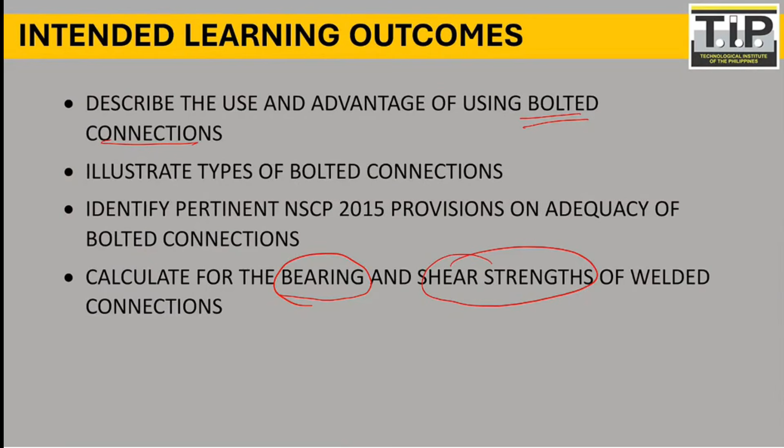The learning outcomes for this lesson is to describe the advantage and use of bolted connection. When do we use bolted connection? We're also going to illustrate the types of bolted connection and what materials we use. We'll identify the NSCP 2015 provisions to calculate the strength of bolted connection, considering bearing and shearing strength.

Bolted connections are connections that use threaded fasteners. I think all of you have already seen what a bolt looks like. If you have a bolt, there's what we call a thread, the spiral part where we insert the nut - that's called the thread.

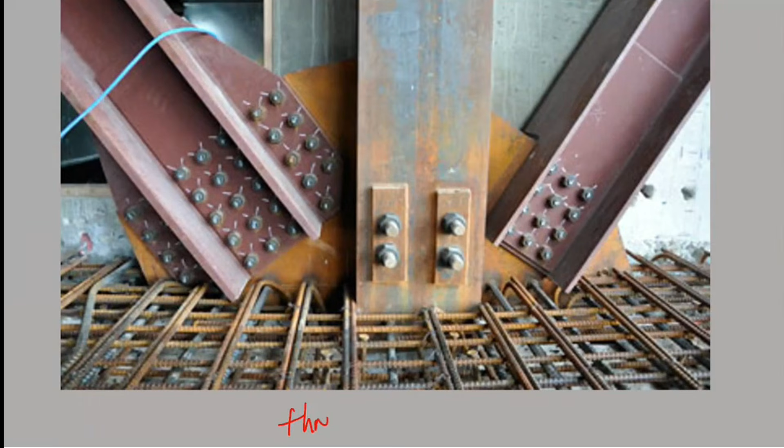So the common type of bolt we use commonly has a thread - this is a threaded connection. If it's threaded, we use what's called a nut. The nut is what tightens at the back - when we tighten the nut, it creates a clamp, clamping the metal together, tightening it.

So we have the nut at the back, and that nut is what rotates along the thread. Commonly, that's a threaded connection.

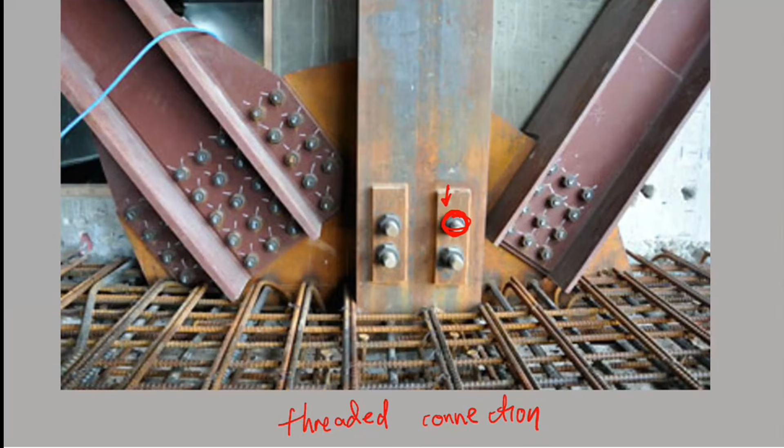We also have bolted connections that are unthreaded. For unthreaded connections, what we call this type is rivets or riveted connection. For riveted connection, we use specialized power tools so that when the bolt is inserted, it closes immediately - you don't need a nut. At the same time, there's no thread in these rivets.

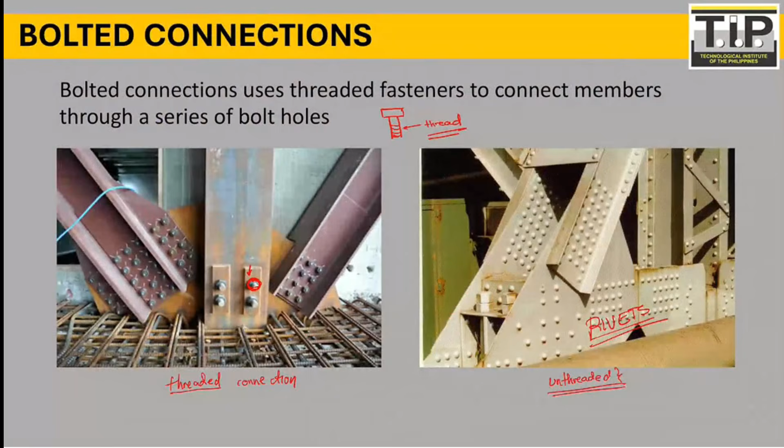In terms of building connections, we have what we call shear connection - I think we discussed this when we covered shear on beams. When we say shear connection, this is the connection of girder to secondary beam. When it comes to shear connection, only the web is connected.

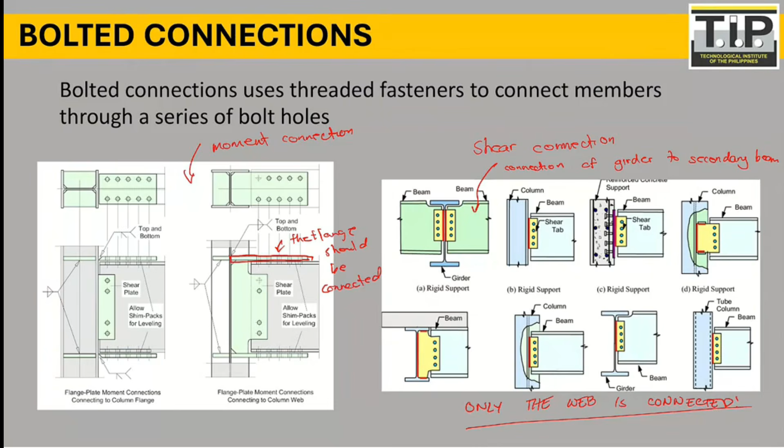On the other hand, when we say moment connection - in order for the connection to be a moment connection, we need to connect the flange as well. Again, the flange should be connected so that our connection becomes a moment connection, because the flange actually handles the moment. So in order for our connection to be a moment connection, we need to connect the flanges.

The advantages of bolted connection: it requires less manpower. Why? Because when it comes to welding, the one attaching the weld is actually a skilled worker called a welder. But with bolted connection, almost everyone knows how to tighten a bolt, so you don't need that skill. Also, you don't need a welding machine, so it's cheaper equipment.

But in totality, welding is actually still cheaper compared to bolting, because with bolts, we also need the bolt plus the plate. At the same time, there's no fire hazard with bolting - welding is a fire hazard because when welding, sparks fly.

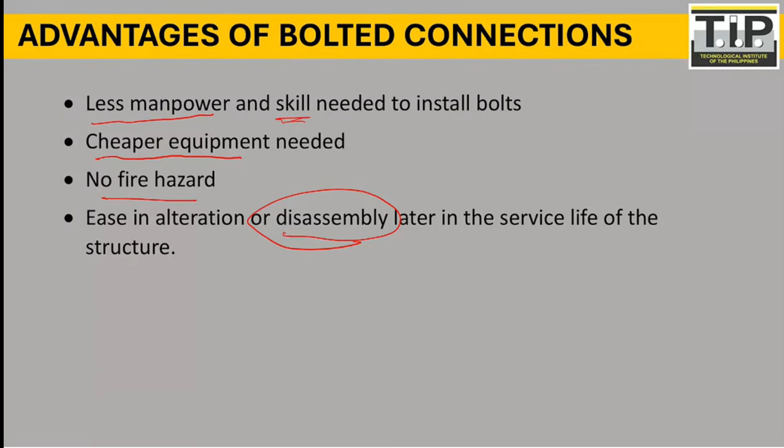At the same time, it's much easier to disassemble - this is actually the greatest advantage of bolted connection. It's much easier to remove. In comparison with welded connection, when it's welded, to remove the weld you'd have to cut the member. But for bolted connections, you just remove the bolt - the member remains intact.

So when it comes to disassembly, it's much easier with bolted connection. Now, there are actually two types of connection. We also have the lap connection or lap joint. With a lap joint, there is actually a single failure plane.

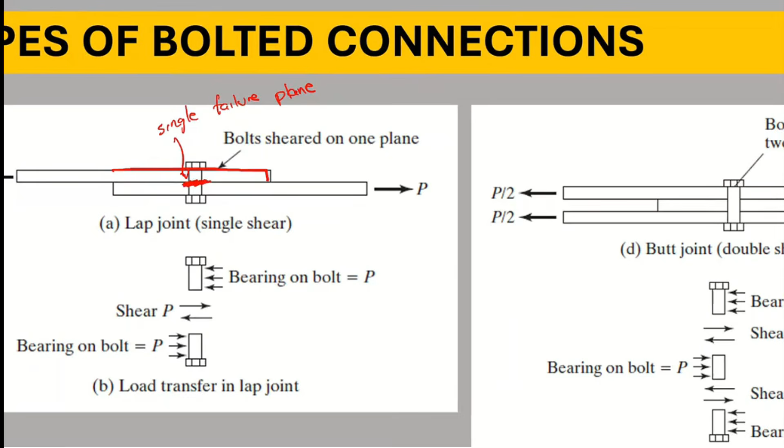So what does single failure plane mean? It means the bolt is only connected at a single plane. So if the bolt fails, it breaks into two. There's only a single failure plane.

The other type of connection is what we call the butt joint. When it's a butt joint, there are two planes of connection, or two failure planes.

So when it's a butt joint, this is what we call double shear. When we say double shear, we have to multiply the area of the bolt by 2. So to get the area of the bolt, area of the bolt will be equal to twice times pi over 4, diameter of the bolt squared.

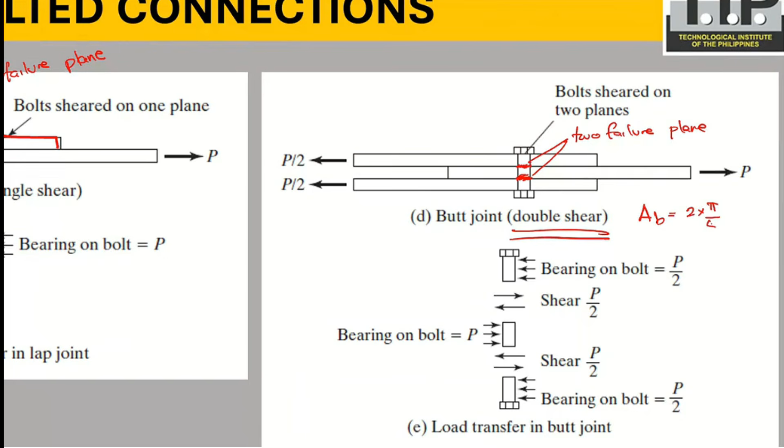But when it's a lap joint, single shear only, the area of the bolt is just equal to pi over 4, diameter of the bolt squared, because a lap joint is single shear only.

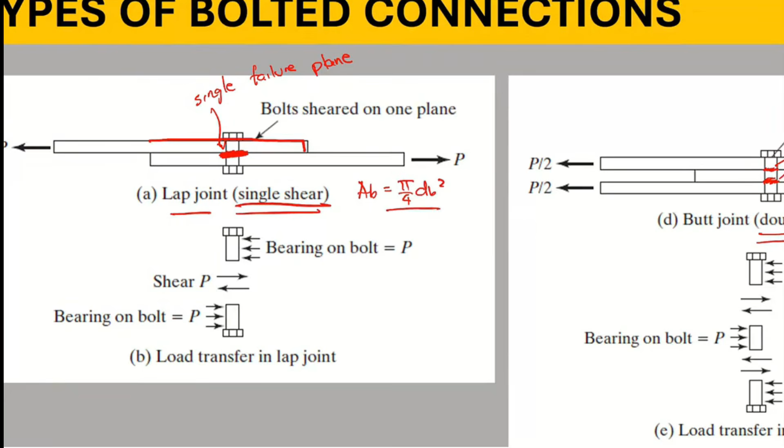Basically, you just have to count how many failure planes a connection has. If it has two, it's two. If three, it's three. But commonly we only go up to two.

There are different types of failure mode, and the most common one is the shearing of the bolt. So when the bolt shears off, basically what happens is the bolt breaks into two. That's called shearing of bolts, when the bolt gets torn.

Another type of failure is basically the rupture of the plate, or tensile rupture. When our plate gets damaged, that's tensile rupture.

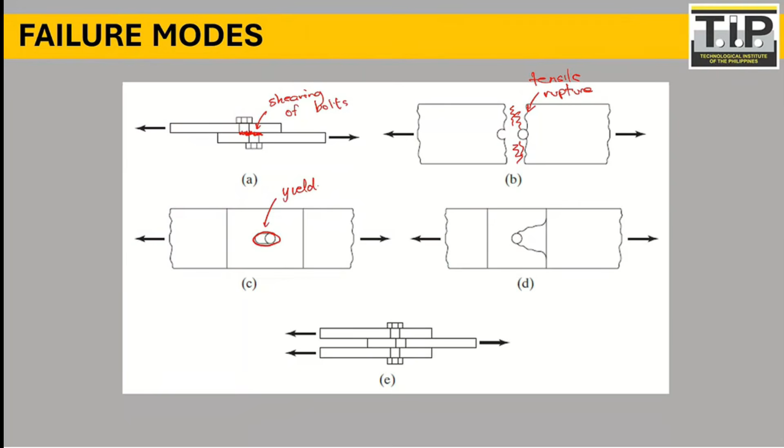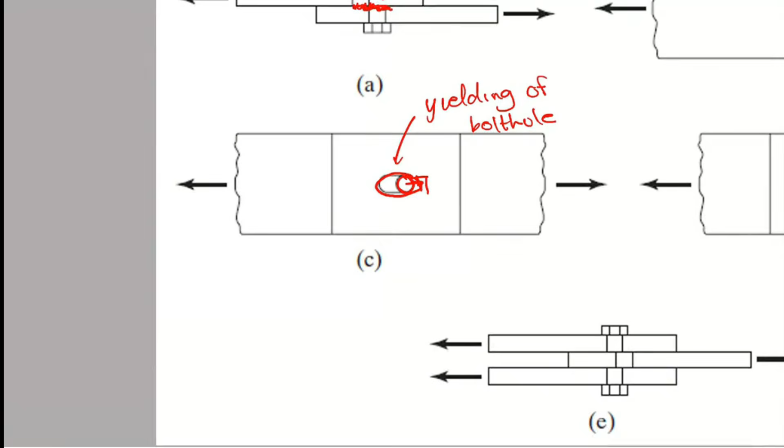We also have what we call the yielding of the bolt hole. So when the stress carried by the bolt is too strong, and it produces a normal stress pressing against the plate, what could happen is deformation.

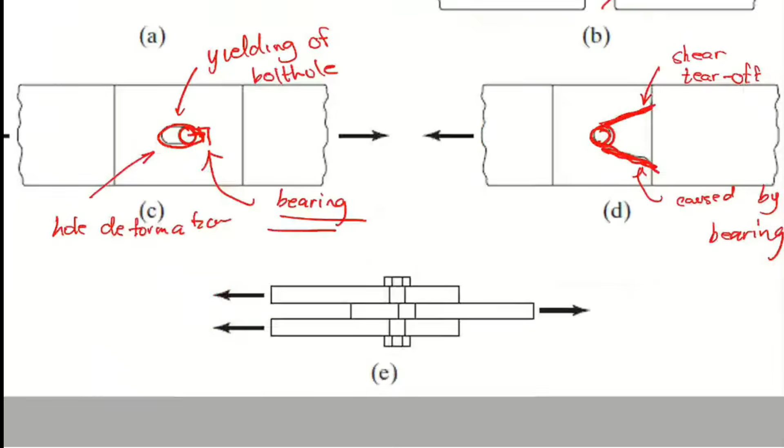Another type of failure, the bolt can also tear into two. This is double shear. Double shear of bolts.

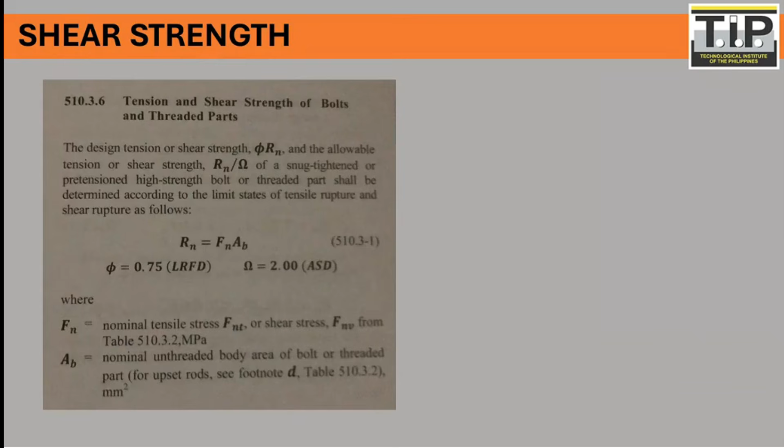So let's go back to the first type of failure. The first type of failure when it comes to bolted connection is the shearing of bolts. According to the code, to calculate the nominal strength for tension and shear strength of bolts, you just have to multiply the nominal stress for shearing or tension by the area of the bolt.

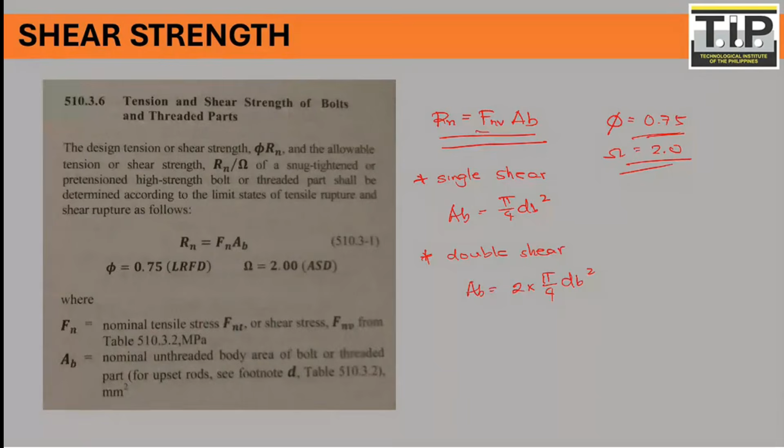So how do we calculate for FNV? FNV depends on the bolt that you use. If the bolt you use is A307, we also have A325 and A490. If what you use is A307 bolts, then the nominal shear strength is 165.

For A325, we have two types. Number one is when the threads are not excluded. When we say not excluded, this is a double negative, so double negative means included.

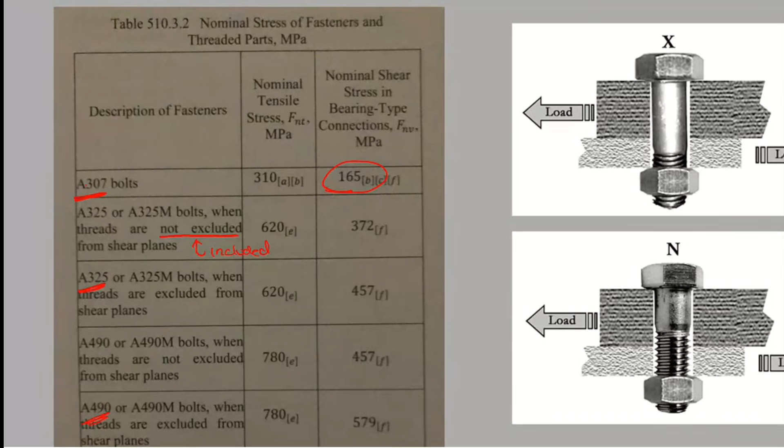Not excluded means included. So if the threads are included, and if this is your failure plane, the threads are included in the failure plane.

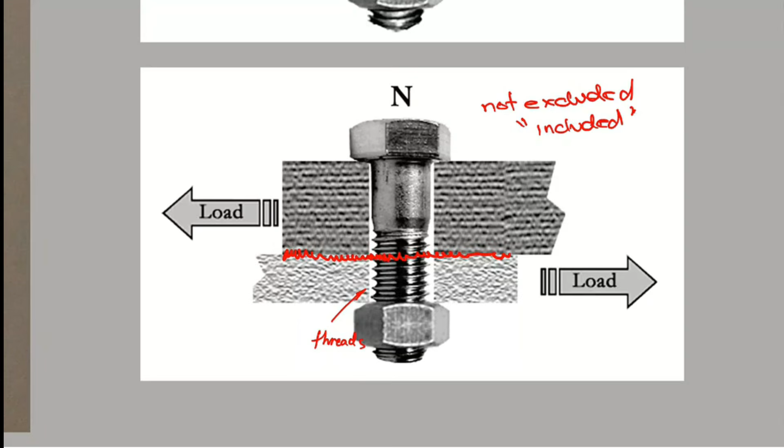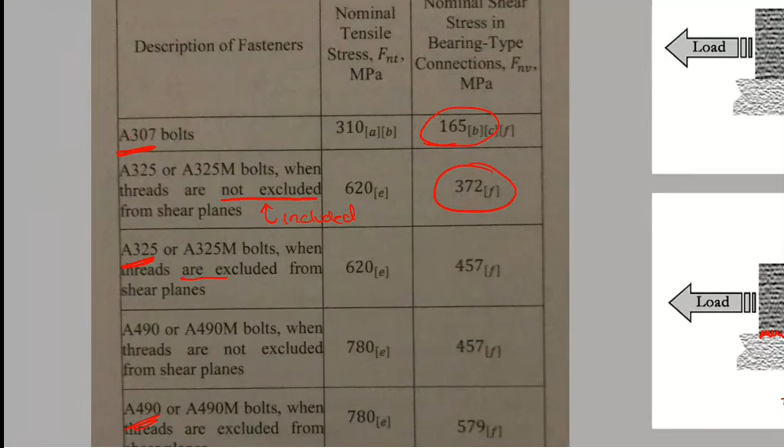Kung napasama dun sa failure plane yung threads, mas mahina yung shearing strength mo. Mapapansin nyo, yung shearing strength is only 372. But when the threads are excluded, ibig sabihin hindi kasama, kung ito yung failure plane natin, walang threads. Hindi kasama yung threads sa failure plane. So kapag excluded, mas mataas yung strength.

You can see 457, mas mataas yung strength niya. So ganun din po sa 490, meron tayo dyan not excluded, ibig sabihin included. And then we also have excluded, which is hindi kasama. Are we clear with excluded, not excluded?

Are we clear on this? Is this clear? Clear po tayo dito? Yes, okay. So if that is clear, let's try to apply what we've learned in this example.

Sabi niya, determine the shear strength of the connection based on bolt shear. Based on bolt shear. So it's actually very straightforward when we are solving this type of problem.

So FNV or RN is equal to FNV times area ng bolt, which is equal to FNV natin, threads not excluded, so that's 372. 372 multiply natin sa area ng bolt, that is pi over 4. The bolt is 20 mm, so 20 squared. Paki-divide ng 1,000 to make it kilonewton.

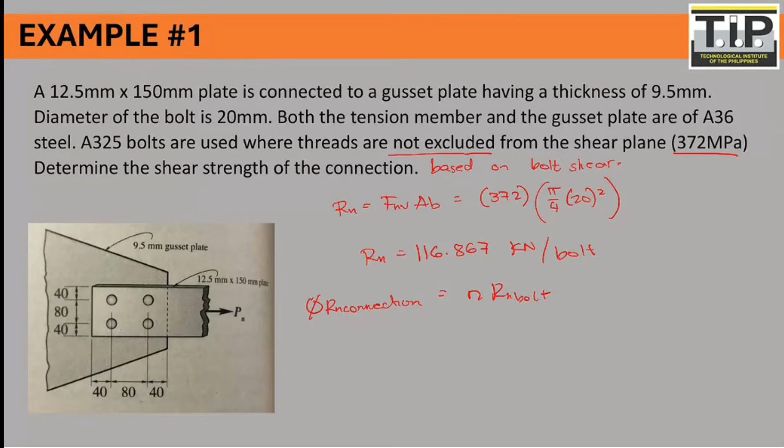Ilan? This is 116.867 kilonewton per bolt. So if I want to calculate for the strength of the connection, phi RN connection, you just have to multiply the number of bolts to the RN per bolt, times the phi factor. Ang phi factor natin 0.75. And then how many bolts do we have? 1, 2, 3, 4. So apat na bolt.

So times 4, RN ng bolt, that is 116.867. Ilan po ito, strength ng connection? 350.601. Yeah, ganun lang siya kadali. Ganun lang siya kadali.

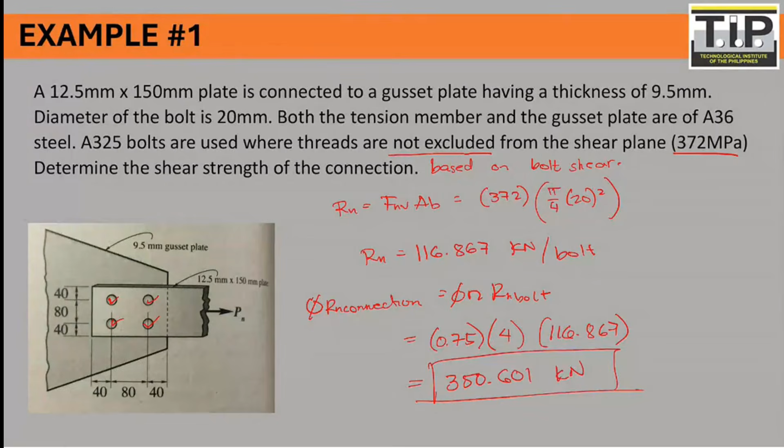So next is a 16 mm thick tension plate is connected by a 6.25 splice plate. So this time, double shear po ito. As mapapansin nyo, we have two plane of failures. So kapag meron kang two plane of failures, double shear ka. If we look at the top view, dalawa yung bolt, ayan. Okay? So dalawa yung bolt.

So calculate muna natin Rn ng bolt. Rn ng bolt will be FNV times area ng bolt. Take note, ang area ng bolt natin will be twice the area kasi double shear. So 2 times pi over 4 times 16 squared. Ilan to?

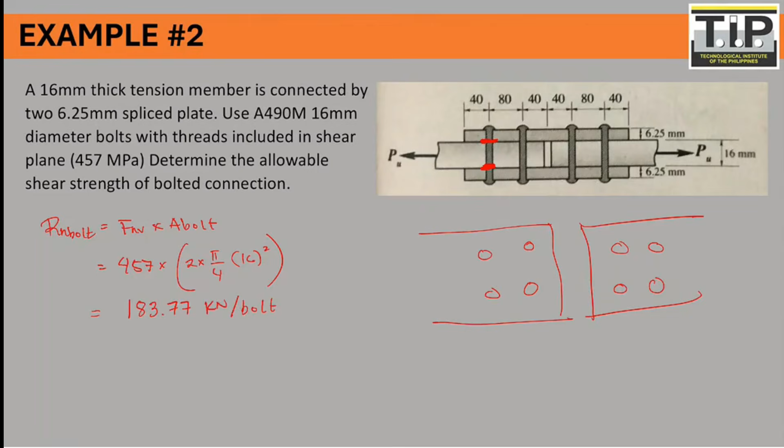183.77 kilonewton per bolt. So to solve for the phi RN connection, how many bolts should I consider? Ilang bolts po, 8 ba o 4 lang? How many bolts should I consider for the whole connection? 4 lang, no? Because sa left side, 4 lang po 'yan. So dapat po 4 lang.

So 4 times the phi factor pala muna, don't forget the phi factor. So the phi factor is 0.75, 0.75 times 183.77 times the number of bolt, which is 4. Ilan? 551.31 kilonewton.

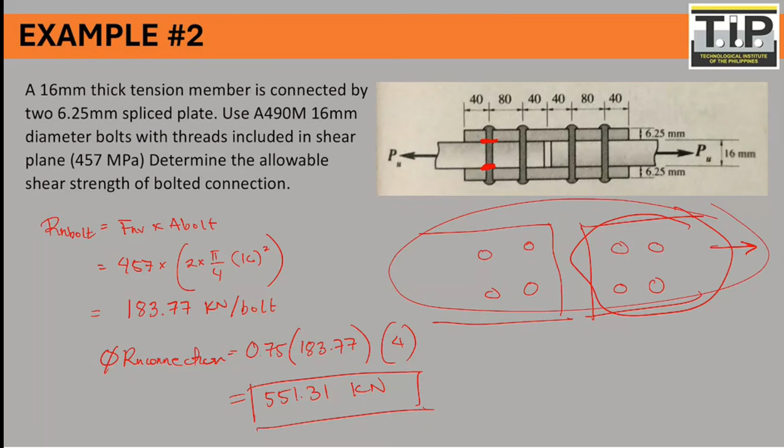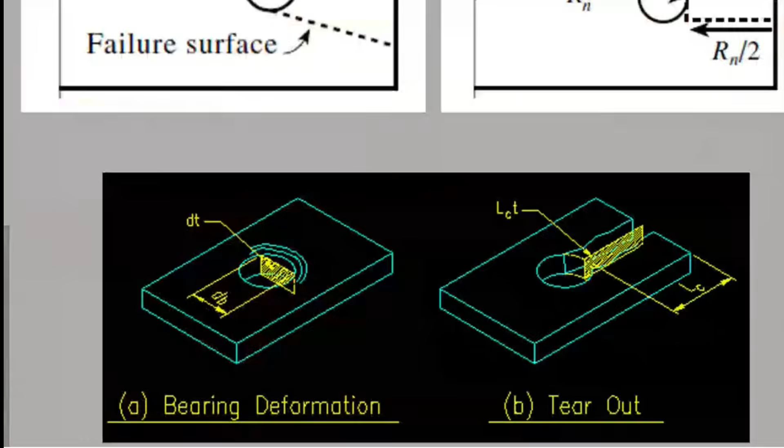Okay, so now let's move on to the next type of failure. Ang next type of failure natin is bearing strength. When we talk about bearing strength, basically, bearing strength is the failure because yung bolt natin dumidiin sa plate. Or in technical terms, our plate or our bolt is actually producing a normal stress onto the plate, papunta dun sa plate.

So because our bolt is actually producing a normal stress onto the plate, dumidiin po siya dun sa plate, nagkakaroon tayo ng two types of failure. The first type of failure is what we call the bearing deformation. Ang ibig sabihin ng bearing deformation, nagkakaroon ng hole deformation, lumuluwag yung hole. That's one type of failure. The other type of failure is what we call tear out. Yung tear out, ito yung sinabi ko kanina, napupunit yung ating plate on the direction of the shear load, direction ng bolt natin. So it could be a tear out or a bearing deformation.

And according to the code, to calculate for the bearing strength capacity, Rn is equal to 1.2 LC T times Fu. So LC is the clear distance in the direction of the force between the edge of the hole and the edge of the adjacent hole. So ano yung LC? It's actually the edge of the hole coming from the edge of the hole to the edge of the plate. Ito yung LC. So how do we calculate for LC? Basically, magkaiba yung LC for edge hole, for edge, saka for inner hole.

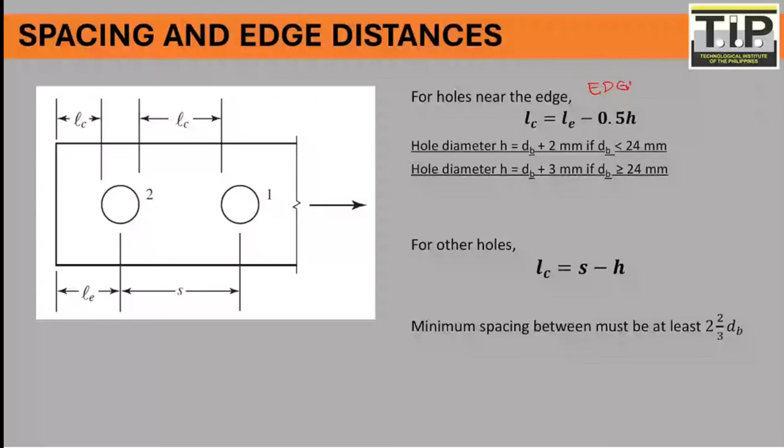For edge hole, that will be the edge distance from the face of the plate up to the center of the hole. Yan yung edge length. So para makuha yung LC, the clear distance LC.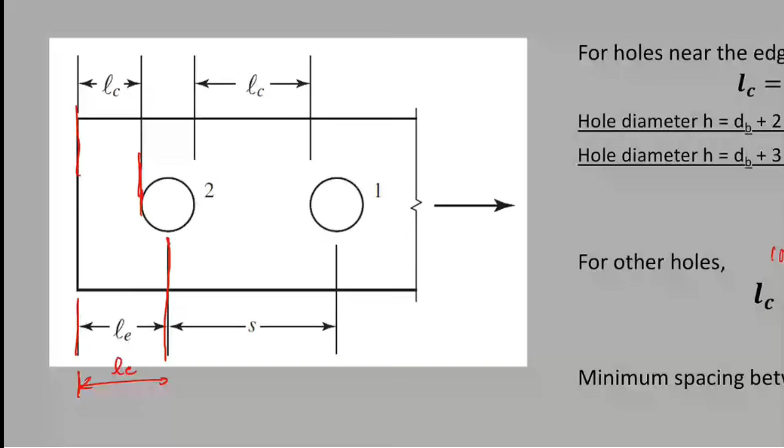LC will be the edge distance minus kalahati ng hole. Bakit kalahati lang? Kasi if we think about it, kalahati lang naman yung nabawas dito, h over 2. Kalahati lang, no? So how do we calculate for the hole diameter?

The hole diameter will be plus 2 if the diameter of the bolt is less than 24, or it will be plus 3 if the diameter of the bolt is greater than or equal to 24. So kapag yung diameter ng bolt is greater than or equal to 24, mag-a-add tayo ng plus 3. On the other hand, kapag less than 24, plus 2.

If you still remember, this is actually our requirement for tension member. Ito po yung nominal hole diameter. Ito yung nominal hole diameter.

Take note, when we are calculating for the net area for tension member, ang formula natin doon, plus 4 saka plus 5. Kasi nag-a-add tayo ng plus 2 because we are actually solving for the net area, according kay code. When you are solving for the net area, magdadagdag ka ng plus 2. Eh dahil hindi naman tayo nagsosolve ng net area, we just need the diameter of the hole, then we are going to use the nominal hole diameter. So yung nominal hole diameter natin, plus 2 saka plus 3.

Okay, for the inner hole, on the other hand, to solve for LC, this LC, that will be the spacing of the hole minus kalahati sa left, kalahati sa right. So basically, that is the spacing minus the hole diameter. Spacing minus the hole diameter. Yan yung LC natin.

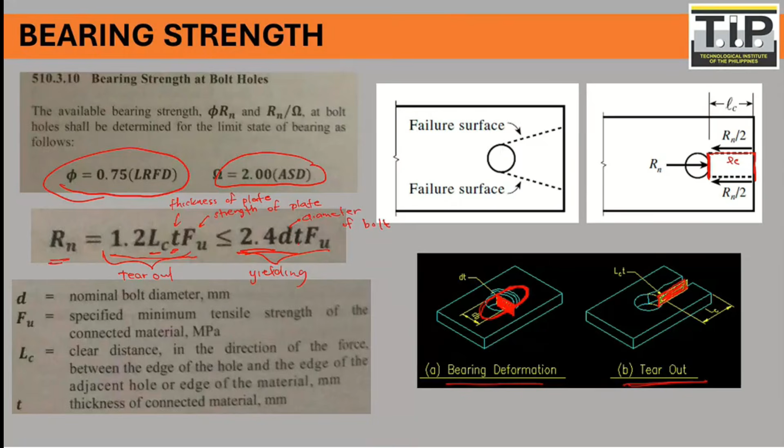Okay, so let's try to apply all those concepts in this problem. A channel shown is attached to a 12 mm gusset plate with 6, 22 mm diameter bolts. Determine the design shear strength considering bolt shear and allowable bearing strength, and the governing design strength considering shear and bearing. So una muna tayo, what is the design shear strength?

What is the design shear strength considering bolt shear?

So, based on our formula earlier, medyo madali lang naman po yung bolt shear, Rn. Kunin natin yung Rn ng bolt. So, Rn ng bolt, that is FNB times area ng bolt. So that is FNB po natin, 372, times area ng bolt, which is pi over 4, 22 squared. Which will give us, what is the Rn ng bolt? Strength of the bolt is 141.41 kilonewton per bolt.

So if I want to determine the strength of the connection considering the bolt shear, phi Rn connection, I just have to multiply the phi factor, 0.75, times the Rn ng bolt, 141.41, times the number of bolt. Ilan yung bolt? 1, 2, 3, 4, 5, 6, 6. What's the strength of the connection? Strength of connection is 636.35.

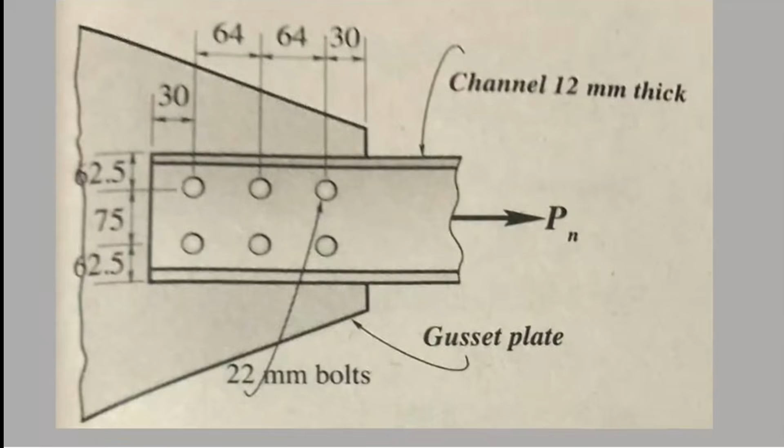Take note, there are two types of failure that could happen in shear tear out. We have two types of failure. It could happen at edge A, or it could also happen at edge B.

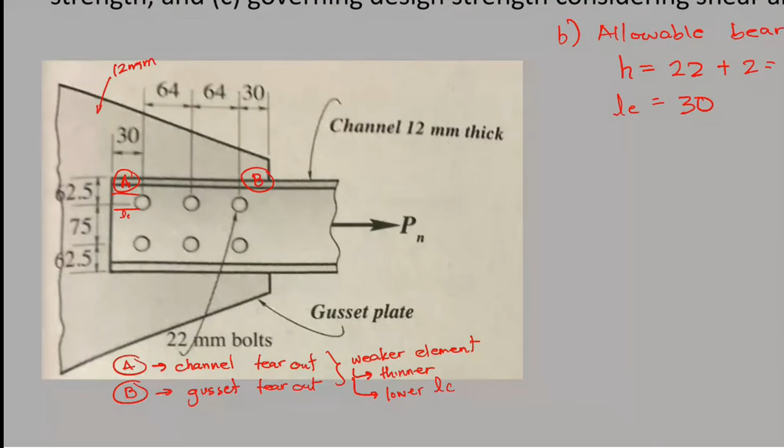Lower LC means lower clear distance. Lower LC or thinner. Or basically, which one is weaker? In this case, we have 12 mm thick channel, and the gusset plate is also 12 mm. So we are going to use either one. We could use A, or we could use B, since they're the same anyway.

They're both 30 mm, both 12 mm. So we could choose either one. 30 mm is what we'll use. For the spacing of the bolt, that is equal to 64 mm. The consideration for the inner bolt is different from the edge bolt. Let's start with the edge. For the edge bolt, our LC will be the edge length minus h over 2, which will be 30 minus 24 over 2, that is equal to 18 mm.

Solving for Rn, for bearing strength, the bearing strength is 1.2 LC T FU, less than or equal to 2.4 D T FU. So Rn will be equal to 1.2 times LC. Our LC is 18. The thickness of the plate is 12 mm. And the FU, or the ultimate strength, is now equal to 400, that's our steel.

So we use 400 MPa. Less than or equal to 2.4. Diameter of the bolt is 22. Thickness of the plate is 12, times FU, which is 400. What's the lower limit? Lower limit: 103.68 kilonewton, less than or equal to the upper limit, that is 253.44. So of course the lower one governs, 103.68 kilonewton. So that is for the edge bolt.

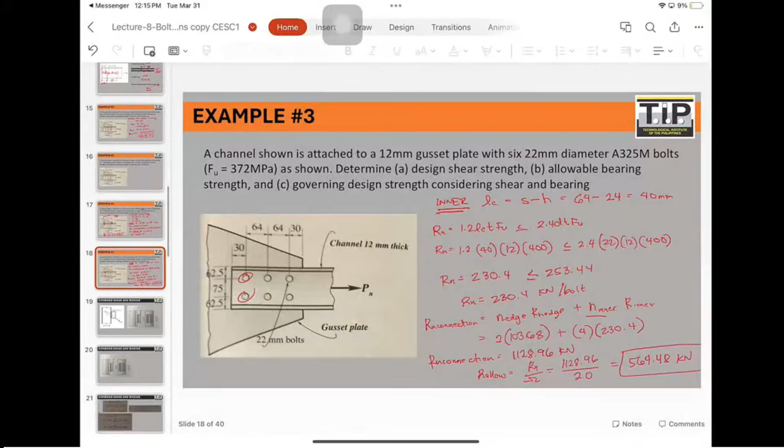Letter C, consider natin yung what is the design strength considering shear and bearing. So pagsamahin na natin yung shear sa yung bearing. Kunin natin yung mga capacity sa edge bolt saka sa inner bolt.

For the edge bolt, ang strength niya for shear, Rn shear, yung na-calculate natin sa una, the shear is 141.41. For bearing, on the other hand, for edge bolt, that is equal to 103.68.

For the inner bolt, yung shear natin is the same kasi equal lang naman yung shear ng bolt, 141.41. Pero yung bearing niya iba. Yung bearing ng inner bolt is 230.4.

So we determine which one is the governing based on the two design strength. Governing for edge, that is 141.41... ang governing pala sa edge bolt, 103.68. For the inner bolt, it's actually 141.41.

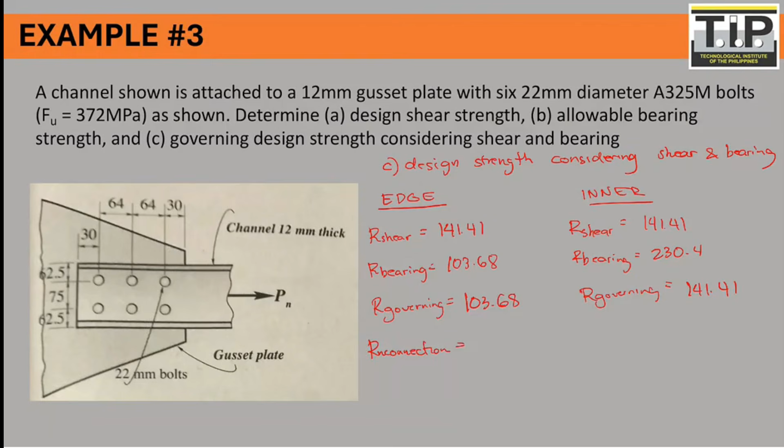Solving for the strength of the connection, Rn connection, that is equal to the number of edge bolts. Ilan po yung edge bolt natin? Dalawa, ang governing design, 103.68. Plus 4 na inner bolt, ang governing strength, 141.41. What's the strength of the connection? Strength of the connection, that is 773.

Solving for the phi Rn, that's 0.75 times 773. So, ilan? 579.75.

Any question about this problem? So when we have tension that is applied at the centroid of the bolt, let's say this is a force that is applied at a tension at the centroid of the bolt, then that is what we call concentric connection. Ibig sabihin, meron po tayong concentric connection when yung load natin is actually applied at the centroid.

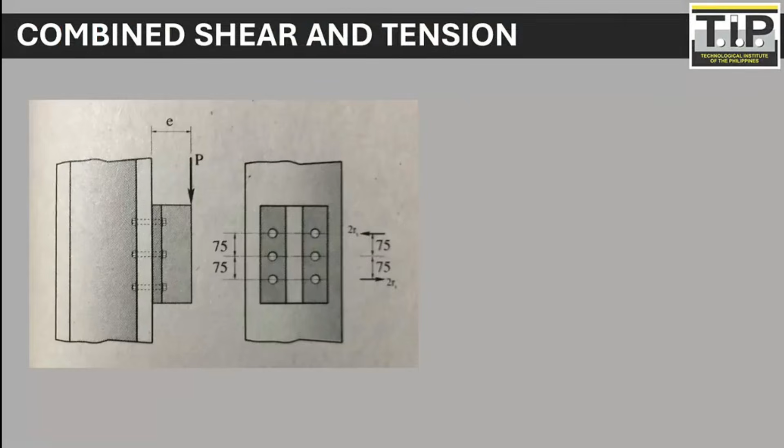And based on the direction of the load here, the component of the load actually has tension as well as shearing. So meron po siyang tension, F tension, as well as shearing. In this type of connection, both the tension and the shearing is actually acting on the bolt. So nagkakaroon po tayo ng tension and shearing. If this is your bolt, yung bolt natin nakaka-experience ng two types of forces, which is number one, you have the tension and you also have the shearing.

Tension and shearing force. Hindi po sila nag-a-add, because tension and shearing are a separate action. Tension is what causes the bolt to elongate. On the other hand, yung shearing naman, ito yung nagko-cause ng snap or gusto niyang maputol yung bolt. So they are actually two different actions. Hindi po natin sila kukuhanan ng resultant. So we are going to treat them separately.

However, how do we calculate them? And what are the instances na nagkakaroon tayo ng tension? Nagkakaroon din po tayo ng tension when we have an eccentricity that is actually eccentricity from the plane of connection of the bolt. So if our force is actually applied at an eccentric distance from the plane of connection, so this is your plane of connection.

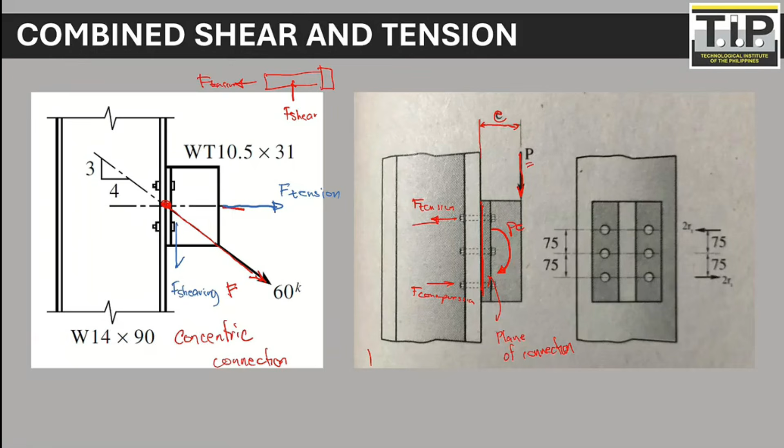So again, if you have a force that is applied at an eccentric distance from the plane of connection, what happens is it produces a moment that is perpendicular to the bolt, and that action produces tension in the bolt.

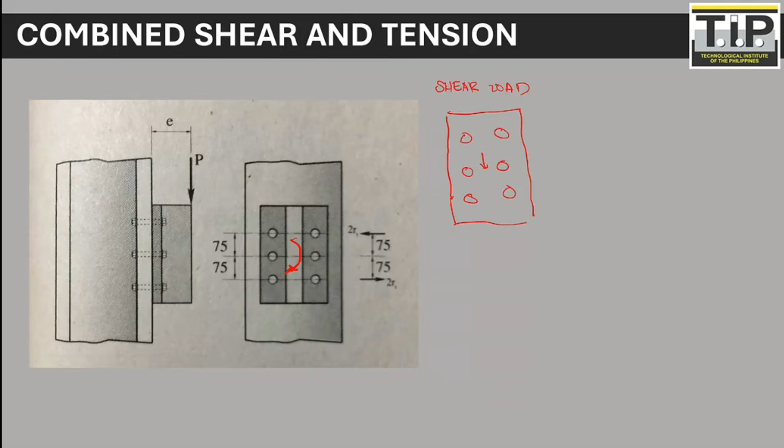So when we have a moment that is perpendicular to the bolt, we can divide the contribution of the action. We have the shear load. For the shear load, basically, if this is your bolt and you have an applied load P, you just have to divide the applied load by the number of bolts to determine the shear load. So F shear, or the shear that is being experienced by the bolt, will be the applied load P divided by the number of bolts N, P over N. And then the next one, you have the moment.

For the moment that is actually perpendicular to the bolt, if this is our bolt connection, and the moment is actually applied about the x-axis, then to calculate for the tension of the bolt, F tension, it's actually equal to the force, which is PE, times Y divided by summation of Y squared, PEY over summation ng Y squared. So Y is actually the distance from the centroid of the bolt group to the bolt in question.

So what we're getting here is when the moment is about the y-axis or about the x-axis. This is the formula when the moment is about the x-axis. When the moment is about the x-axis, the distance we get is actually y. We just get the distance y of the bolt. Let's say this is y1 and this is y2, y3, y4. You just get the summation of y squared.

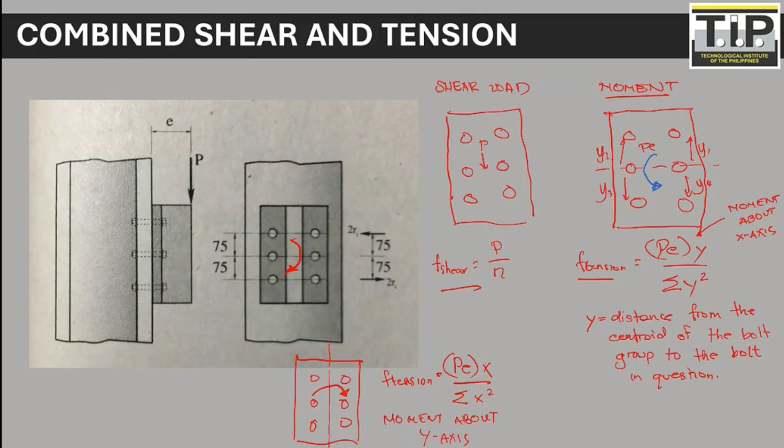So how do we calculate the capacity for tension? The capacity for tension with corresponding shear according to the code is F prime of NT. So the capacity of the tension bolt with corresponding shear is F prime of NT times the area of the bolt. Whereas F prime of NT is the tension of the bolt that is actually modified to include the effects of shearing stress. So F prime of NT is actually 1.3 FNT minus FNT over phi FNV times FV. So FNT over phi FNV times FV is less than or equal to FNT. So FNT is actually the strength in tension. This is the strength in tension.

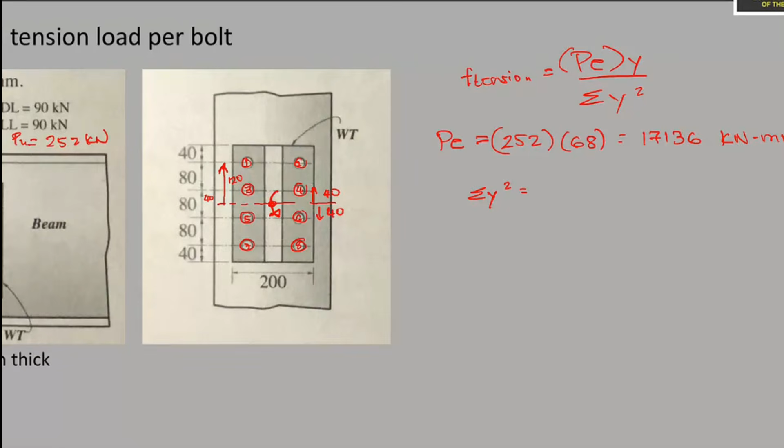So let's get the distances for y squared. For bolt number 1, that is 40 plus 80, so that's 120 for bolt number 1. For bolt 3 and bolt 4, that is 40. Bolt 5 and bolt 6, that is 40. Bolt 7 and bolt 8, that's 120. So basically, we just get the distance.

So bolt 1 and 2, that is 120, so 120 squared plus 120 squared - that's bolt 1 and bolt 2. For bolt 3, that is 40, since from the center, it's only 40 for bolts 3 and 4. So 40 squared plus 40 squared. Bolt 5 and 6, that is 40 squared plus 40 squared. Plus bolt 7 and 8, that's 120 squared plus 120 squared.

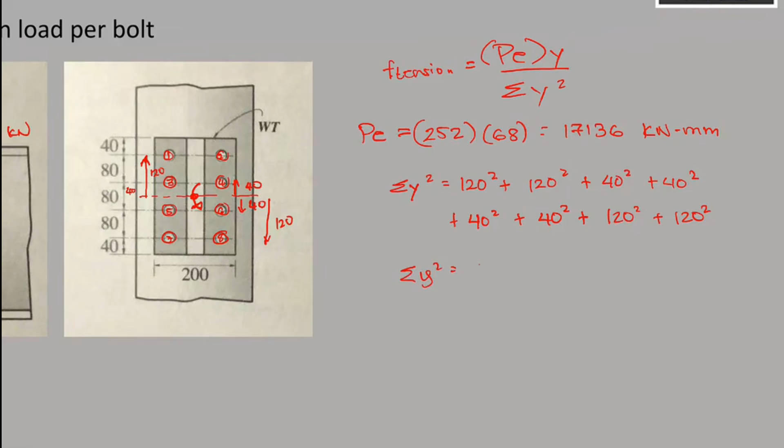What is summation of y squared? 64,000. 64,000 millimeters squared. And then solving for the tension, F tension,

that is P times E. Before we solve for the tension, we have to locate the critical bolt. Take note, when it comes to tension, the critical bolt will be the farthest from the centroid. So the farthest from the centroid is actually bolt 1, bolt 2, bolt 7, and bolt 8. So you just pick any bolt, that will be the critical bolt.

So in that case, PE is actually equal to 17,136 times the distance from the centroid to bolt 1, 2, 7, 8. The distance is 120. So multiply by 120 divided by summation of y squared, 64,000. How much is the tension?

Tension is 32.13 kilonewton per bolt. 32.13 kilonewton per bolt. So solving for 32.13 kilonewton per bolt.

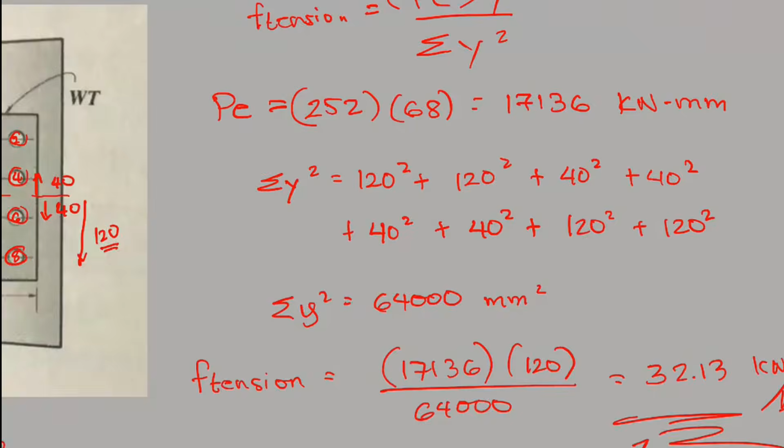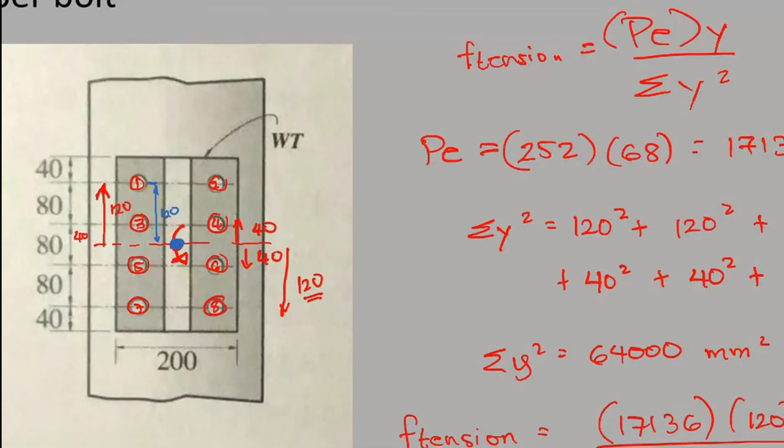To get the summation of y squared, basically, if this is our centroid - let me color it blue - this is the centroid. You just get the distance from the centroid. So the distance to the centroid for bolt 1, isn't this distance 120? 40 plus 80 squared. And for bolt number 2, also 120. That's why it's like this.

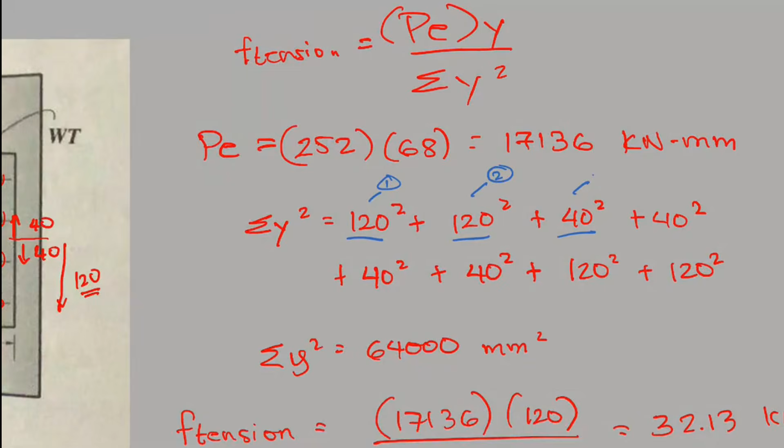Bolt 1, this is bolt 1, 120. Bolt 2, bolt 3, 40 - since this is 40, distance from the centroid - bolt 4, bolt 5, bolt 6, bolt 7, and then bolt 8. Are we clear on how to calculate the summation of y squared? I just got the distance from the centroid.

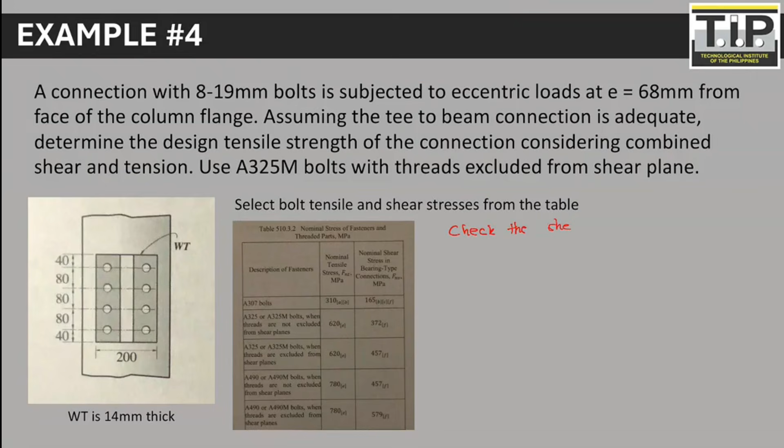Check for the shearing of bolts. Ang shearing natin, we are using A325 threads excluded, that's 620 and 457. So FNB is equal to 620, FNT is 620, and FNV is actually 457 megapascal.

620 and 457. So to check the shearing of the bolt, alam natin that Rn of bolt for shear is equal to FNV times area ng bolt. So that is 457 times area of the bolt, that is pi over 4 times 19 squared.

So what's Rn for the bolt? The strength of the bolt of a single bolt in terms of shear, divided by 1,000 to make it kilonewton, is 129.57 kilonewton. Calculating for VRn, that is 0.75 of 129.57, which is equal to 97.18 kilonewton per bolt. So this is the capacity of our bolt for shearing.

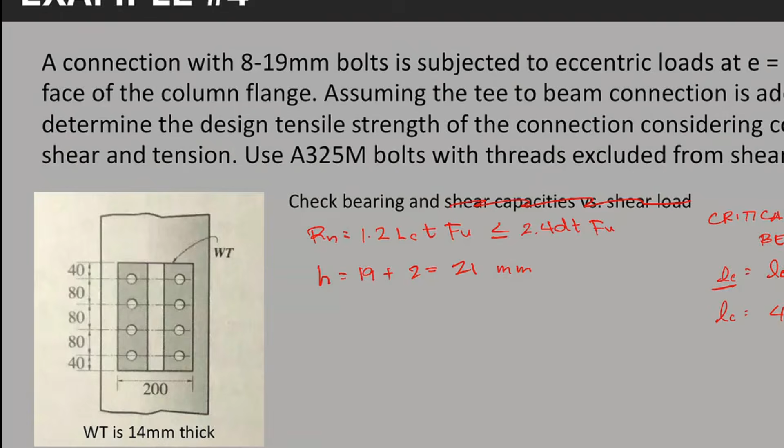Yeah, that's 29.5. So for inner bolt, on the other hand, ang LC natin will be spacing S minus H. So that is spacing 80 minus H, 80 minus 21, that is 59.

So dito pa lang sa LC, makikita na natin that this is actually critical. Dahil mas maliit po yung LC ng edge bolt, so we are going to consider yung edge bolt.

So solving for the bearing strength of edge bolt, that is equal to 1.2 LC, that is 29.5, times thickness. Thickness is 14, so 14 times FU, 400, for A36 steel, less than or equal to 2.4 D. The diameter of the bolt is 19 times thickness, 14, times FU, 400.

What's the lower limit? Lower limit muna, that's 198.24 kilonewton. Upper limit, that is 255.36. So our capacity for bearing, that is 198.24. Solving for VRn, that is 0.75 of 198.24, that is 148.68.

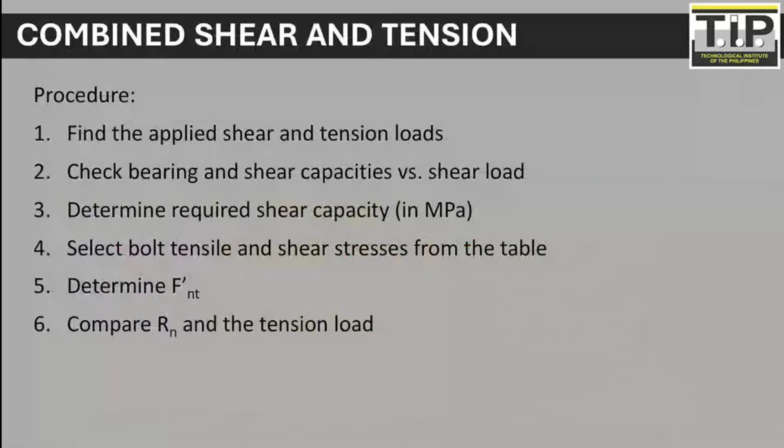Ngayon, check naman natin for tension. To solve for tension, we solve for F prime of NT. F prime of NT will be based on our code earlier, that is 1.3 FNT minus FNT over phi FNV FV, times FB. So this should be less than or equal to FNT.

Substituting, ang FNT natin is actually 620. So 1.3 ng 620 minus 620 over phi 0.75 times FNV, which is ang FNV natin is 457 times FB. FB is the shear load sa bolt, so that is F shear divided by area ng bolt. Ang shear natin is 31.5 times 1,000 to make it megapascal, over area ng bolt pi over 4, 19 squared. Ano yung FB? FB is equal to 111.10 megapascal. So that's how you calculate for the FB - basically you just calculate for the shearing of the bolt over the area of the bolt.

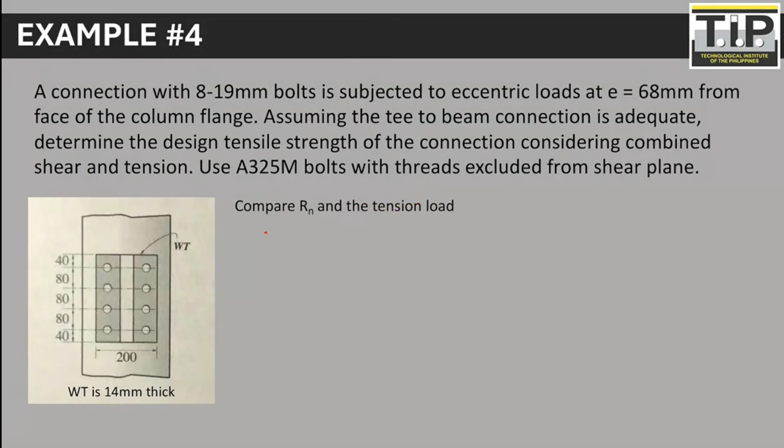And then to calculate for the capacity of tension, VRN will be 0.75 times F prime of NT times the area of the bolt. So VRN for tension, that is 0.75 of F prime of NT, 605.03, times area of the bolt, which is pi over 4, that is 19 squared. What is the capacity for tension?

128.66 kilonewton. Then to check for the demand over capacity ratio, ang DC ratio natin, the demand is actually the tension that we calculated, ang tension natin 32.13. So 32.13 divided by the capacity, which is 128.66. What is the DC ratio? 0.25, so this 0.25 is less than 1.0, so that is safe.

Any question? That's how you calculate, that's how you check the adequacy of a connection if it has combined shearing and tension. As you can see, kung gagawin natin ng summary yung ginawa natin, basically you just find the shearing, hinanap mo rin yung tension load. After calculating for the tension load, kinalculate mo yung capacity. To calculate for the capacity, we check muna yung shear ng bolt, we check for the shearing of the bolt as well as the bearing of the bolt, and then you calculate for the capacity for tension. The capacity for tension is actually dependent doon sa FV, sa shearing din. And then you can now check the capacity for tension. So, chinek mo lahat ng pwedeng failure: shearing, bearing, and tension.

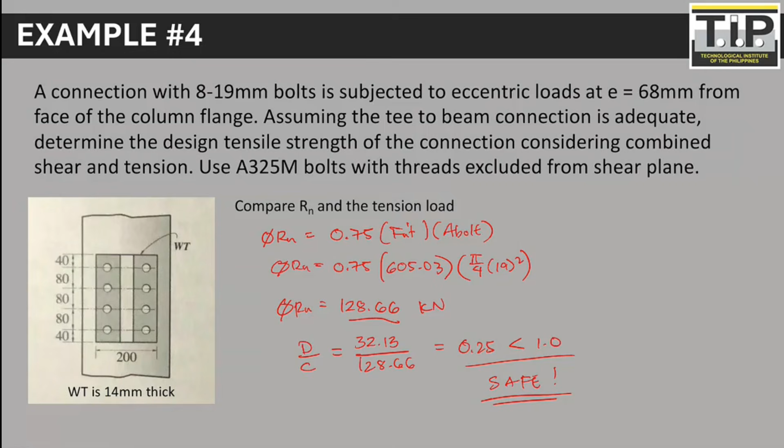For the next topic, we are now going to combine shear and torsion. It's actually different from earlier, kasi kanina, yung moment natin perpendicular to the bolt, sa bolt group, perpendicular sa bolt. But this time, the force is actually parallel to the group. So that means, if you have an applied load P, yung moment niya is now parallel to the area of the bolt. So that means, ang napoproduce na force will be torsion.

And just like in the weld, parehas po ito nung sa weld - basically, the force applied will be the contribution or the component of the direct shear load, direct shear, plus the torsional shear.

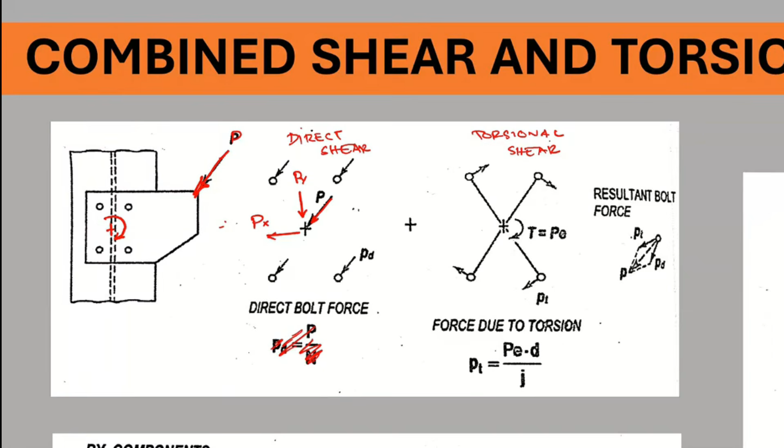For the direct shear, to calculate for the contribution of the direct shear, we could take the component ng P. So meron tayong component sa PY, meron din tayong component sa PX. So to solve for the direct load, I will be using the same variable na ginamit natin sa weld. So we have FDX, that will be PX divided by the number of bolt. FDY will be equal to PY divided by number of bolt. So that's the direct load coming from the direct shear, and the direction of the direct load will depend on the direction of the load - yung FDX and FDY.

On the other hand, the force due to the torsion, we could get the component of the torsion. So kung yung torsion is actually going clockwise, again, yung component ng forces should be going clockwise, parang sa weld lang din. So kung going clockwise, dapat for this bolt, it will be going to the right and then downward, this one going to the left and then downward, this is left and then upward, and then to the right and then upward. Nakuha? So, that is the component of the torsional shear - this is now FTX saka FTY.

So, to solve for FTX and FTY, kunin natin yung component. So, FTX is equal to PE. Kapag X component yung sinosolve mo, it will be PEY over J.

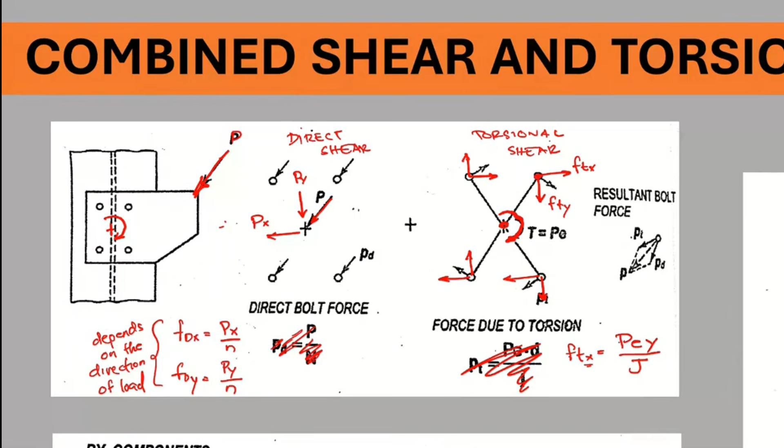PEY over J. On the other hand, if ang sinosolve naman natin is FTY, that will be equal to PEX over J, PEX over J. So yung X and Y are the distance from the centroid of the bolt group. So centroid of the bolt group, just like this one. Ito po yung X and ito yung Y.

To the bolt in consideration. So ang J natin or the polar moment of inertia is equal to the summation of x squared plus y squared. Summation of x squared plus y squared, for the polar moment of inertia when it comes to the bolt in torsion, torsional shear.

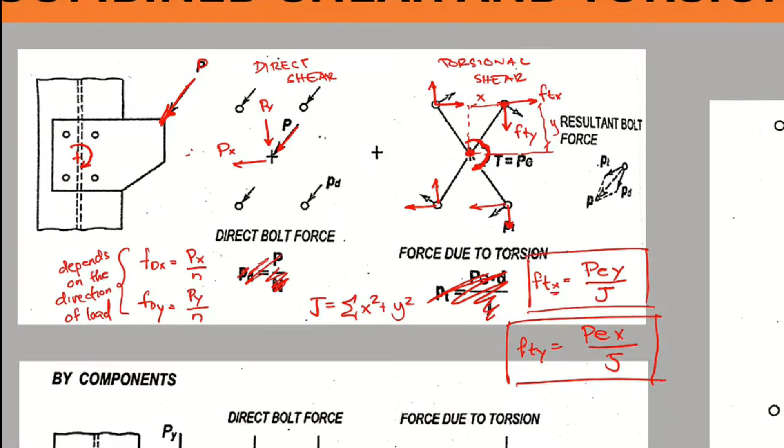And then in order to determine what is the critical bolt, we are going to follow the same formula for weld. So for the critical bolt, we are going to follow the two criteria. Criteria 1, it should be the nearest to the line of action. And criteria number 2, it should be the farthest from the centroid.

Then, once we determine the direct shear force and force due to torsion, we can now add, we can combine the contribution of direct and torsional. So yung X, yung FDX, i-add natin sa FTX. And then yung FDY, i-add natin sa FTY.

And then we can now get the resultant force. This is your resultant force. The resultant force is the square root of the summation of force along X plus the summation of force along Y squared. So that's the resultant force. This is now the maximum shear in the bolt. Ito po yung max shear on bolts, yan na po yung maximum shear sa bolts.

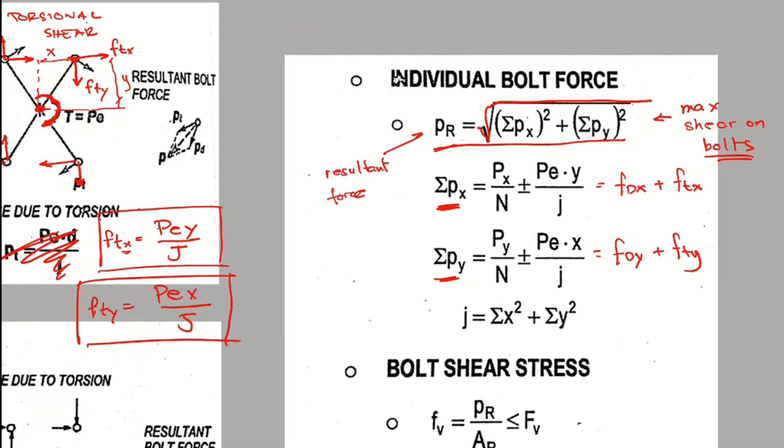So, to calculate for the bolt shear stress, that is the resultant, F resultant, divided by the area ng bolt. That's the bolt shear stress. Okay?

So, as you can notice, it's actually similar to the weld, yung formula po natin sa weld. But this time, what we are dealing with are bolts. So parang yung sa weld pero bolts na po tayo. Okay? Let's try to apply this in this example. I'm going to enlarge this connection para mas madali.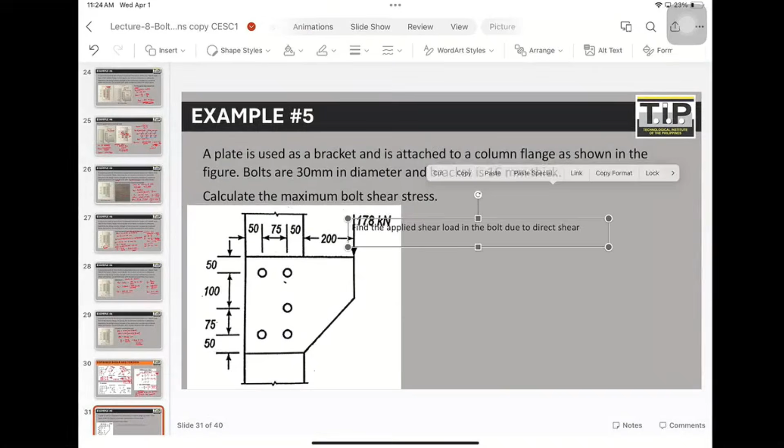So first thing to do when you have a bolt group, ito po, combine ano na to, no? Combine bolt and torsion, combine shear and torsion. So first thing to do, locate the centroid of the bolt.

So para mahanap natin yung centroid ng bolts, maglalagay ako ng reference point. So this will be my reference point. So coming from the reference point, alamin natin yung centroid ng bolt. So if I want to locate for x bar, gagamit lang ako ng Varignon's theorem. So that will be area total times x bar is equal to summation ng area times x.

In calculating the centroid of the bolt, we are going to assume that the area of the bolt is equal to 1. Bakit po 1? Because magka-cancel din naman yung area ng bolt. All of the area of the bolt will just cancel out, so mas okay na i-consider mo na area ng bolt is just equal to 1.

So for locating the centroid of the bolt, for x bar, this is our reference line. Reference line for x bar. So gawin natin, this is bolt 1, bolt 2, bolt 3, bolt 4, and this is bolt 5. 1, 2, 3, 4, 5.

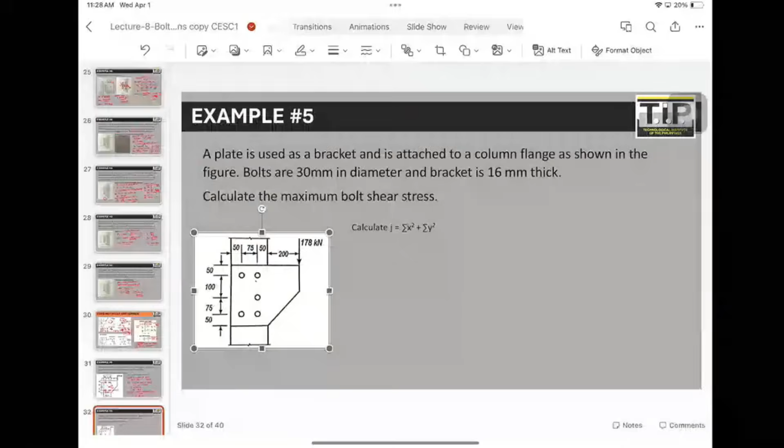So calculating for J, let's say our centroid is located at 45, this is 45, and this is 85. So J will be, this is the centroid of the bolt group. J is equal to the summation of x squared and y squared.

For x squared, for bolt number 1, bolt 2, bolt 3, bolt 4, and bolt 5. For bolt number 1, how far is it from the centroid in terms of x? 45, 45 squared. For y, how far is bolt 1? This is 85, so that is 90. Bolt 1 is 90 from the centroid. That is for bolt 1.

For bolt number 2, x squared and y squared. If this is 45, this is 30. So for bolt number 2, that is 30 squared plus 90 squared.

For bolt 3, what is the value? If that is 90, this is 10, and this is 30. So for bolt number 3, that is 30 squared plus 10 squared.

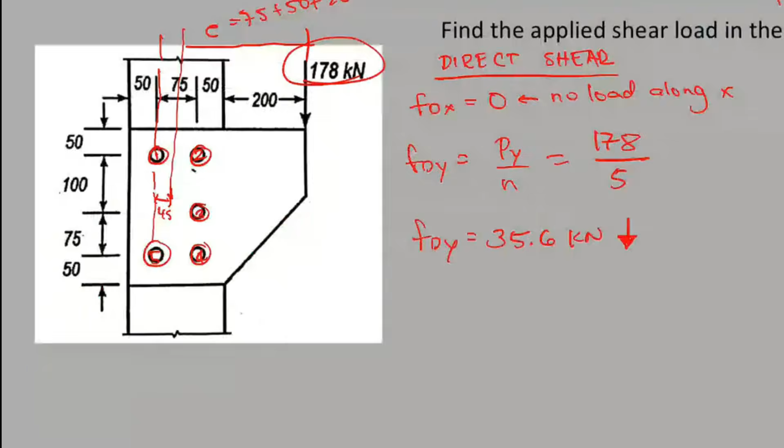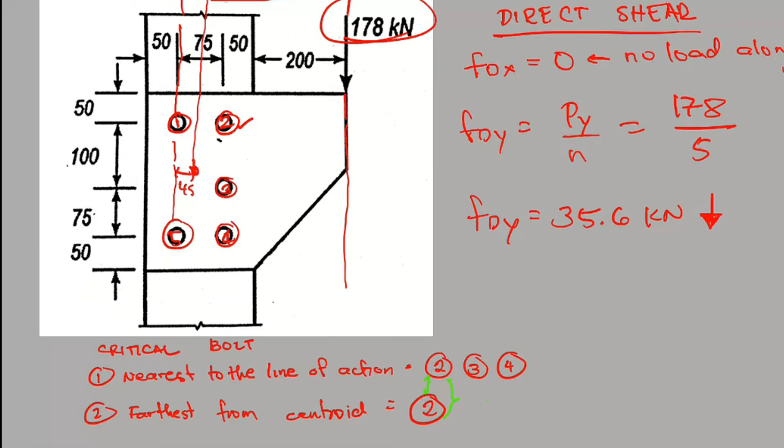Kilonewton millimeter. So to solve for the torsional load, let's first identify the critical bolt. If this is bolt 1, bolt 2, bolt 3, bolt 4, bolt 5, what is the critical bolt? For the critical bolt, criteria 1 is the nearest to the line of action, that is bolt 2, 3, and 4. On the other hand, farthest from the centroid is bolt number 2.

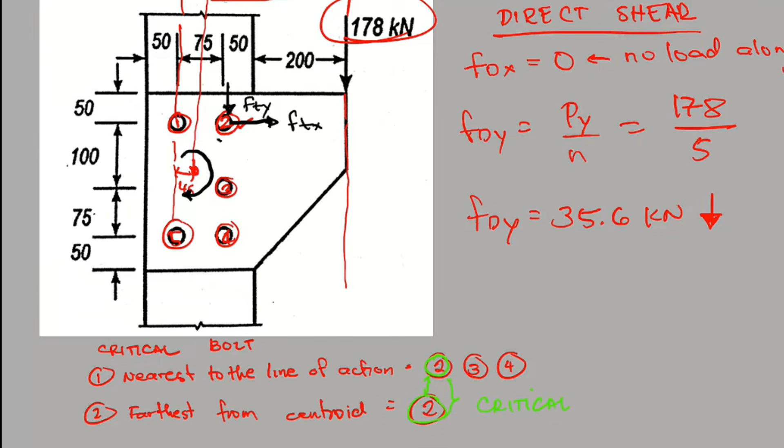So since bolt 2 satisfies both criteria, the critical bolt is bolt number 2. So if bolt 2 is critical, let's identify the direction of the shear force. We have a moment that is going clockwise, so the direction of the torsional load component should also be clockwise. Going to the right, that is FTX, and going downward, FTY. Downward and to the right, that is the contribution of the torsion. So we can now solve for the torsional load, FTX.

FTX, that is PE, which is 49,840 times Y. Gaano po kalayo yung Y from the centroid? This one? This is 90, no? 90. PEY, 90 over J. Ang J natin is 37,500. What is FTX?

119.62 kilonewton. The direction of the load, we also hindi pala downward, no? FTX pala tayo. FTX. So FTX is going to the right.

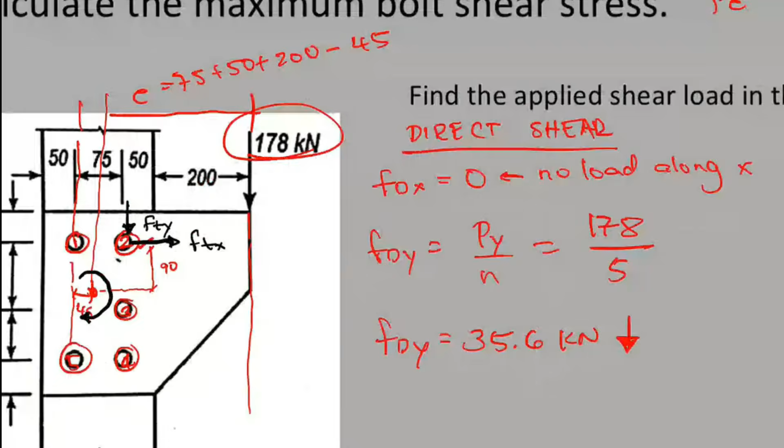FTY, on the other hand, FTY is PE X over J. Ang PE natin is 49,840 times X, the distance from the centroid to bolt 2, that is, if this is 45, this is 30, no? Distance is 30. So 30 over J, J is 37,500. What is FTY?

39.87 kilonewton, and that is downward. So to determine the resultant force, lahat po ng same direction i-add natin. So to determine the F resultant,

F resultant is the square root of FDX plus FTX squared, plus FDY plus FTY squared. So that is now the FDX direct shear load, that is 0. FTX, wala tayong FDX, 0. FTX is 119.62 squared plus FDY, which is 35.6. Mag-a-add sila kasi parehas silang downward. They are both going downward, no? FDY saka FTY, 39.87.

So what is the resultant shear load? 141.44 kilonewton. So if you want to calculate for the bolt shear stress, FB is equal to F resultant over area ng bolt, that is pi over 4. F resultant po na, that is 141.44 times 1,000 to make it Newton, over area ng bolt, pi over 4, 30 squared.

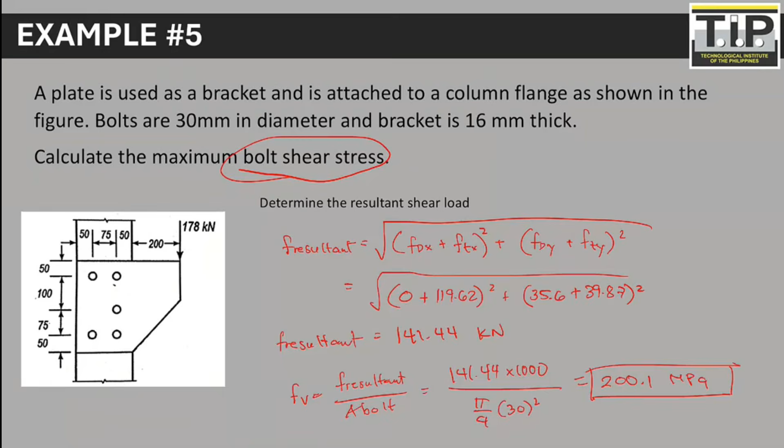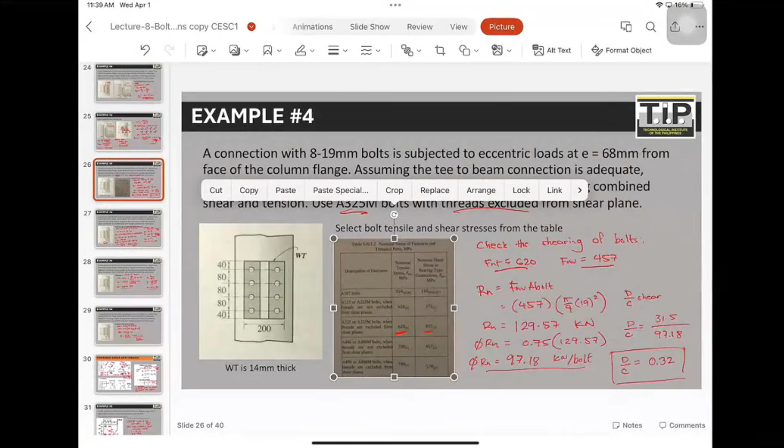Let's say for example dagdagan ko po ng tanong: calculate the DC ratio if the bolt is A325, threads excluded. So calculate natin yung DC ratio if the bolt is A325 threads excluded, no? So ito po yung table natin. Basically A325 threads excluded, that's 457.

So gamit tayo ng allowable stress design, use ASD. So calculate natin yung R allowable. R allowable ng bolt, R allowable, that is FNB times area ng bolt over omega. So that is FNB 457 times area ng bolt pi over 4 30 squared over omega 2.0. Ilan po ito? R allowable.

Ano po yung allowable strength ng bolt? Divided by 1,000 to make it kilonewton, 161.52 kilonewton. So solving for the DC ratio, the demand ang demand po natin yung maximum shear, 141.44 divided by 161.52 as the capacity. Ano pong DC ratio natin? 0.88. So 0.88 is less than 1.0, that is safe.

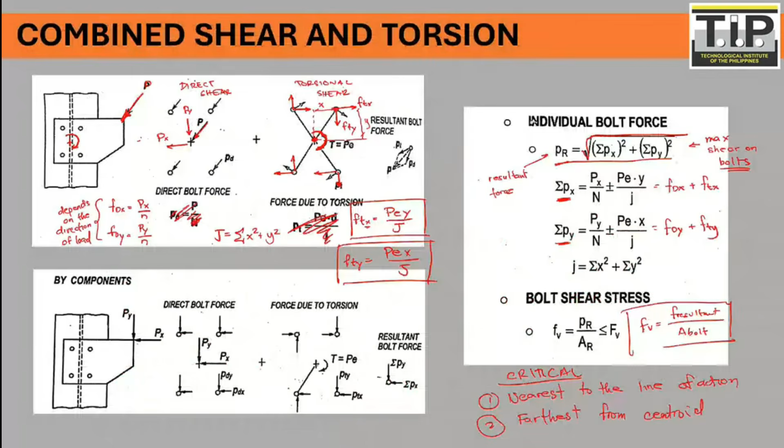As you can see, parehas lang nung sa weld. Actually parehas lang siya nung sa weld. We calculate for the centroid, you calculate for the J, polar moment of inertia, you calculate for the contribution and direct shear sa torsional load. And then you calculate for the resultant, then you check for the capacity. Are we clear in this? Clear po ba to? Clear po ba?

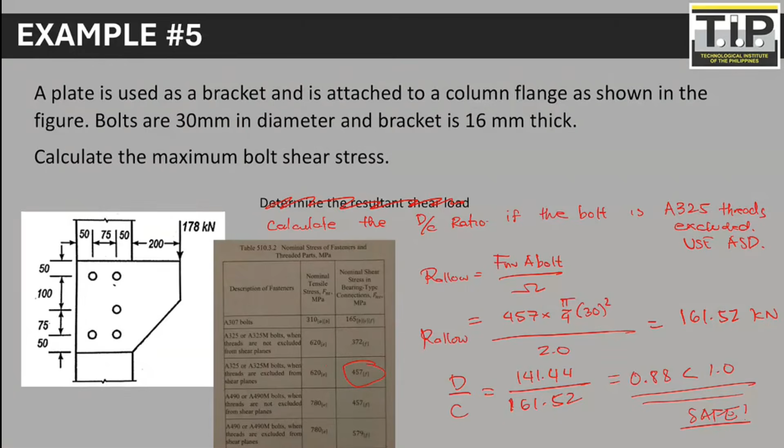Okay, so our key takeaways for this discussion for bolted connection is that bolted connection use threaded fasteners to join two elements together at a given joint. This type of connection was proven to be economical because it doesn't need skilled worker, pero in totality mas mura pa rin po si weld. Failure modes typically observed in bolted connection are bearing and shearing, basically bearing failure and shearing failure. That's the common failure modes in bolt connection. Bearing strength consider shear tear out and member deformation, so shear tear out, that is 1.2 LCTFU. Pagka naman po member deformation, 2.4 DTFU.

Okay? For shear strength, considers the presence and absence of threads, so meron tayong threads excluded saka threads included. A combination of shear and tension may occur in bolts when the bolts are applied with eccentricity. So kapag meron tayong eccentricity, kapag tensile strength, kapag tension saka shearing, we treat them separately. So separate po sila. Pero kapag torsion saka shear, kinukuha natin yung resultant. Torsion and shear, nag-a-add to, you get the resultant. Okay? So magkaiba yung consideration when it comes to combine tension and shear, and combine torsion and shear. Okay?